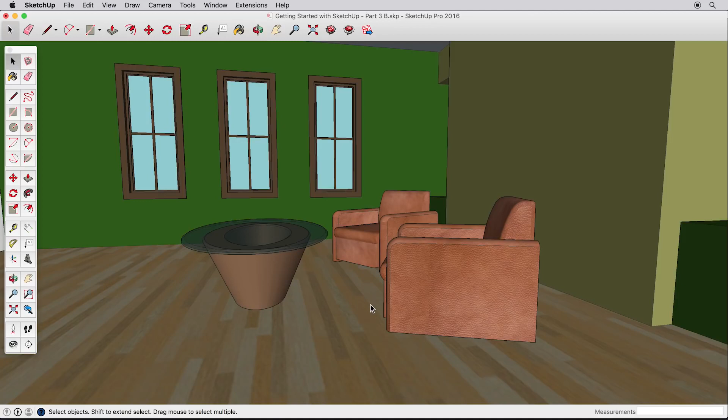If you were creating your own space, the first thing you need to do is take some basic measurements of the size of the room, and where windows or other prominent elements are to accurately recreate the space. We know how to draw accurately in SketchUp from the previous video, so for our example, let's begin by drawing a room that is 16 feet wide by 20 feet long, and push-pull it up 9 feet.

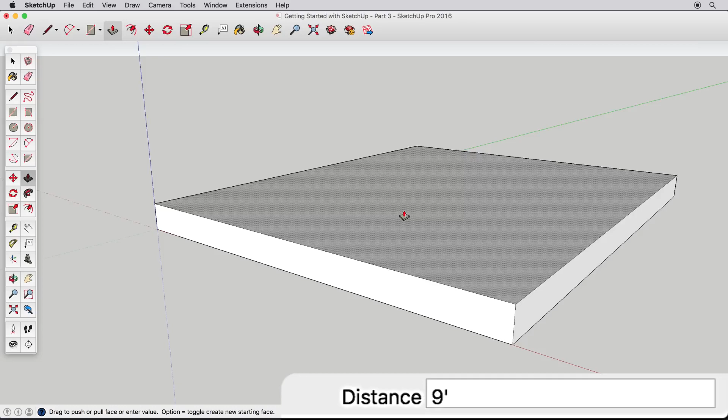When you're working only on an interior room, it's often helpful to erase some of the walls, and we can always draw them back in later. Using the eraser, erase this corner edge, which will delete 2 of the sides. You'll see the inside surfaces are a different color from the outside surfaces we've been working on, but it will have no effect on our example, and we're going to paint these surfaces anyway. Navigate to get a good view of this back surface.

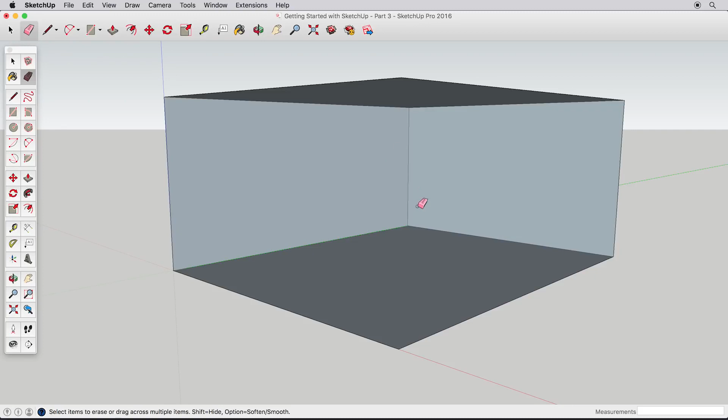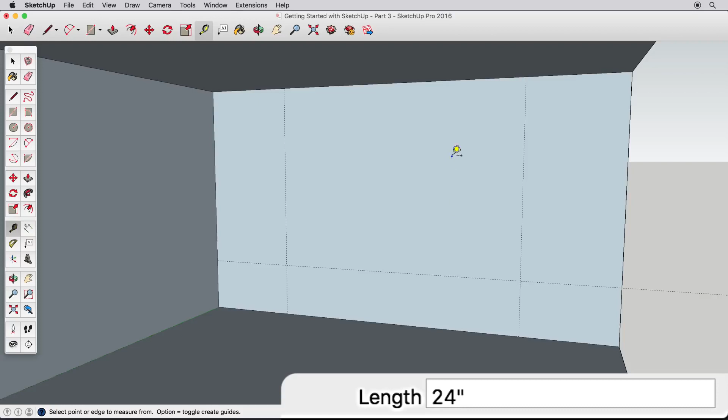Now let's use a new tool to help us lay out some guidelines. The tape measure tool can measure between points in SketchUp, but it will also create guidelines that we can reference. Click once on this corner edge and start moving your cursor this way. Type 40 inches to create a guide 40 inches from that edge. Now, repeat this process from the opposite edge. Create a guideline that is 24 inches high, and a final guide that is 18 inches down from the top edge.

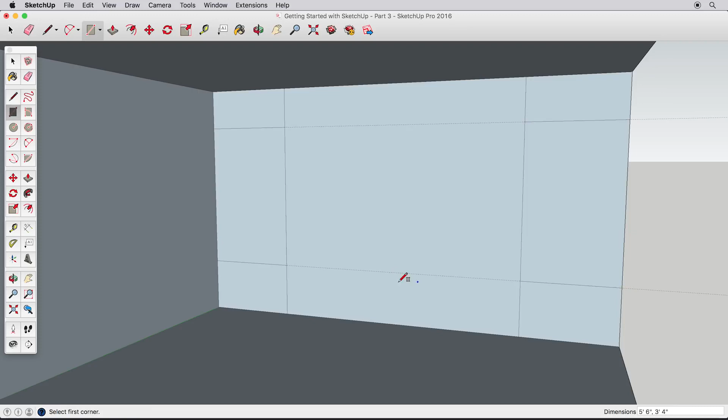With these guides in place, let's add detail to our room by creating a built-in structure. Draw 3 rectangles using the guide intersections here, here, and here. Now we can delete our guides. You can delete guides with the eraser tool, but some of our guides are now hidden behind edges. You can see this by zooming out. Zoom out far enough to see all the guides and erase them. Or you can also delete all the guides in your model by going to the Edit menu and choosing Delete Guides. Navigate back into our room.

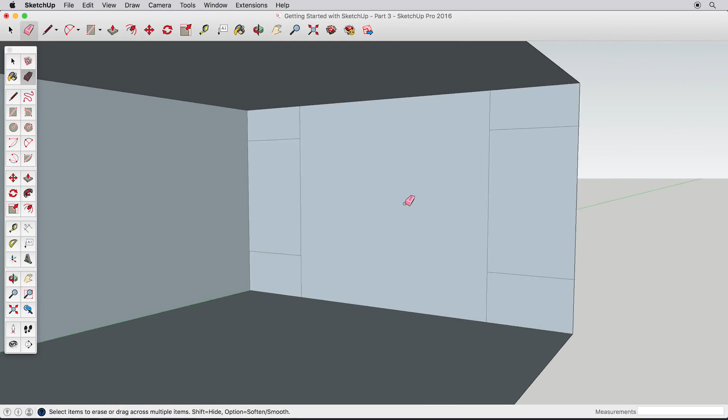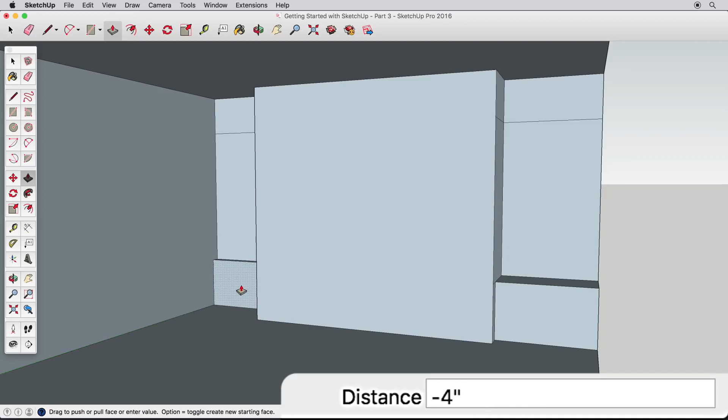Use Push-Pull to pull this middle surface out 24 inches. Now pull this lower surface out 18 inches. We need to pull the far surface out 18 inches as well, but rather than manually inputting the distance, we can use inferencing. Click once with Push-Pull on the far surface to start pulling it and leave the surface with your icon. Watch how hovering over various surfaces will pull it out to match. We can simply infer to this near surface and click on it to finish.

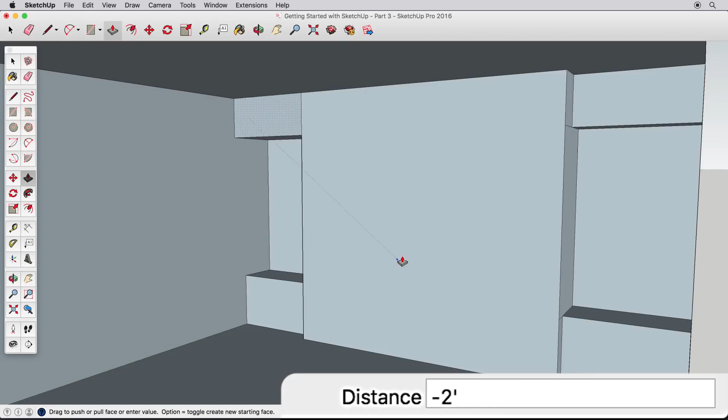Try again on these upper surfaces. Pull one out 2 feet, then pull the other surface out and watch how it will infer to the other surfaces. Remember, you'll click once on the first surface to start the push-pull, but you'll finish by clicking on the other surface. It's good modeling technique to keep your model clean. Let's erase these extra edges created from our push-pull.

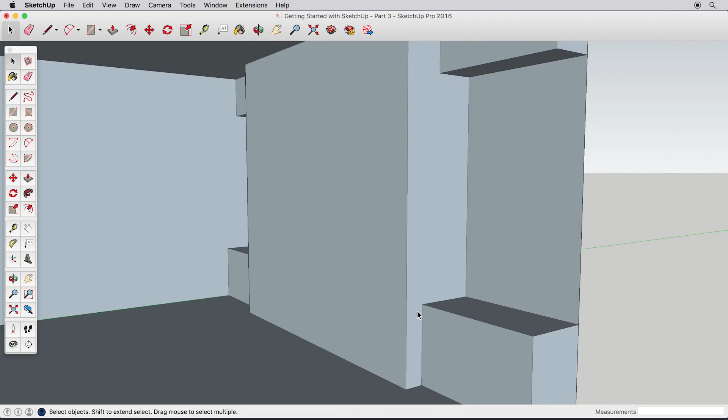Anytime you have surfaces that are coplanar, you can erase the edges separating them. This is called healing the surface. Zoom in if you need to erase the unnecessary edges. We need to navigate to the other side and erase those edges as well. When you do, it's tricky to find the ideal view, and it's easy to orbit outside of the wall surface.

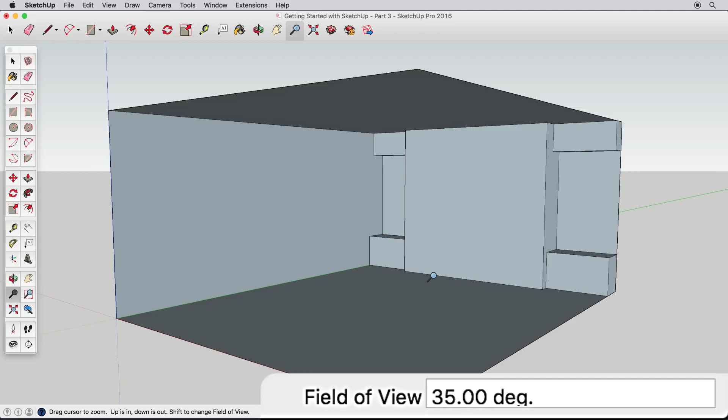Try this. Navigate back to a full room view, and then choose the Zoom tool. Look down in the measurements box. It shows your field of view is 35 degrees. You can change this just like changing the lens of a camera, allowing us to see more perspective in our view, which is particularly useful for interior scenes. Type 50 and press Enter. Now the field of view shows 50 degrees, and we have a broader view of our scene. Navigate back to the corner and find a good view to erase the extra edges.

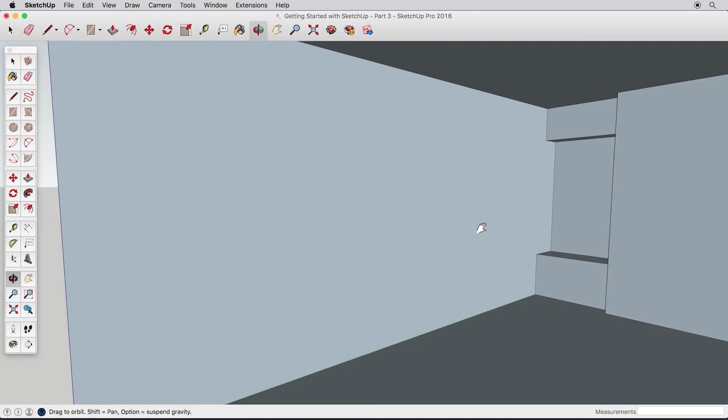With that done, let's turn our attention to creating some windows. Navigate to a good view of this wall and use the tape measure to create a guide 5 feet from the far wall. Create another guide 30 inches from the first. Now create a guide from the bottom edge and infer to our built-in structure to finish it. Do the same from the top edge so our windows will line up with the other elements in our room.

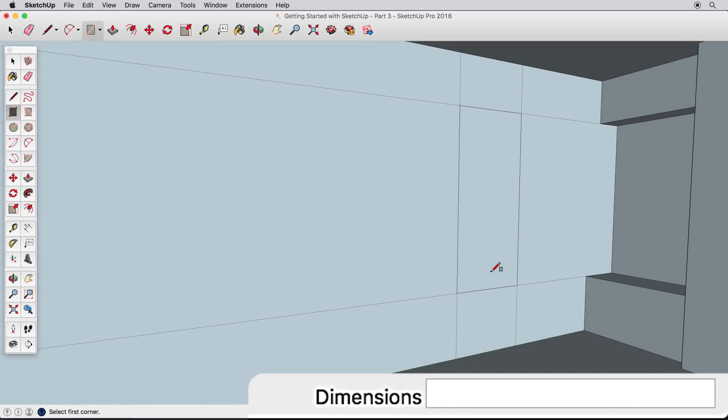Draw a rectangle using the guides for our window. Our room will have 3 windows on this wall, and they'll be 18 inches apart. Create a guide 18 inches from our new window. Now select the new rectangle, then the Move tool. Move the rectangle from this lower corner and start moving it along the wall.

While still moving the rectangle, press the Control key on a Windows machine or the Option key if you are on a Mac. This leaves the original shape and creates a copy for you to move. Use the guideline reference to place the new rectangle. Practice this again for the third window.

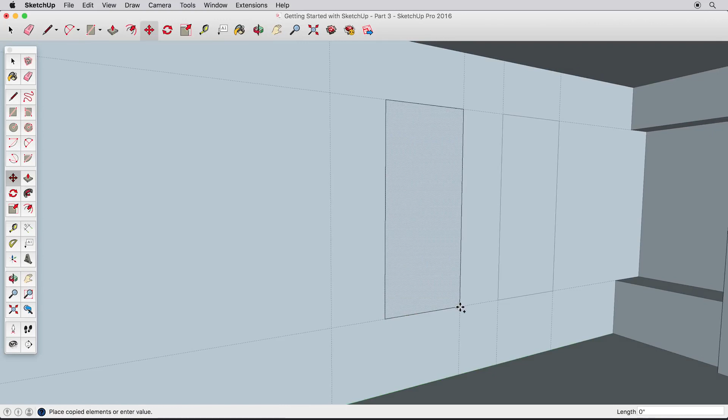Create a guideline 18 inches from the new window. Select and move a copy of the window by pressing Control or Option on a Mac. And remember to move it exactly by moving it from a corner to a corner. We are finished with the guides, so go to the Edit menu and choose Delete Guides to erase them all.

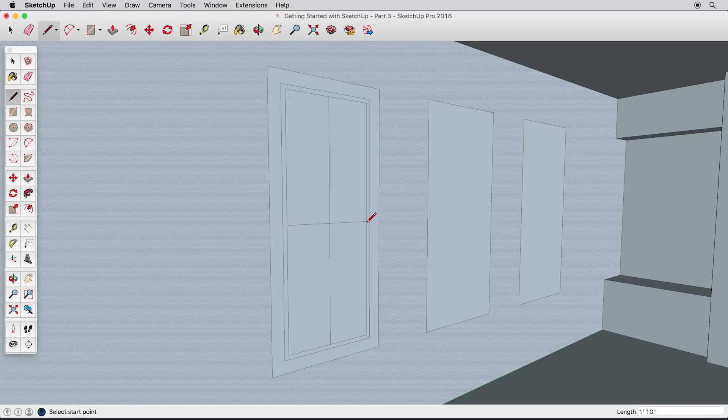To make the windows more detailed, we'll use the Offset tool and introduce some new tips to help you work quickly. Zoom into one of your windows and offset the surface inwards 3 inches. Then select the inner surface and offset it 1 more inch. Now, use the Line tool and draw 2 crossing edges from the midpoints of the inner surface. Finally, select one of the new rectangles created by the crossing edges and offset it in 1/2 inch for a window mullion.

SketchUp will remember the last distance you offset, so rather than typing in a value for the remaining window mullions, select another surface, then using the Offset tool, double-click on that surface. It will offset it the exact amount of the last offset. Try again on the 2 remaining rectangles. Select the surface, then use the Offset tool and double-click to quickly offset it by the last amount.

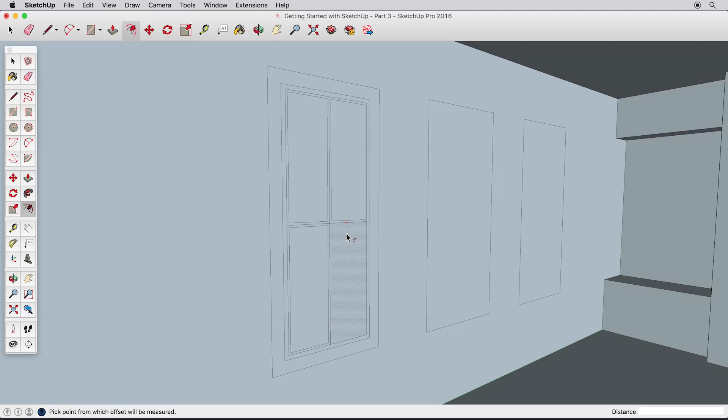Double-clicking also works with Offset. Try selecting, then offsetting one of the windows in. Then select a new window and double-click with Offset on a different window. Continue this for all windows. Select the surface, then double-click with the Push-Pull tool to push it in the same distance.

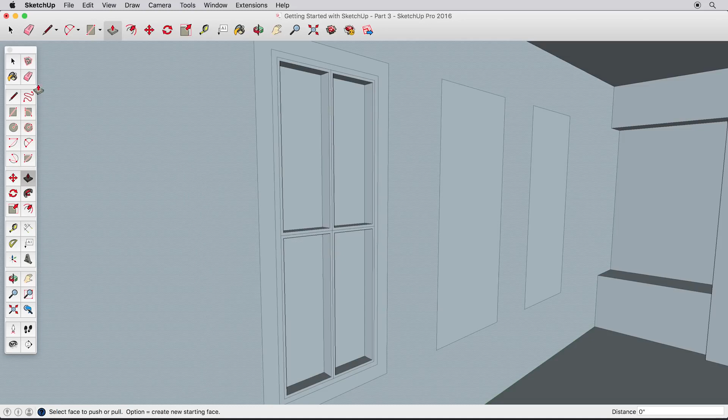To push the window mullion back, let's first zoom in and erase the crossing edges to heal this into one surface. Then push it back, and also pull the other surfaces in or out to create an interesting window and frame.

Now we need to repeat this process for our remaining windows. And because we've built one, we can use inferencing to quickly repeat the process. For example, I can offset this surface from this lower edge and infer to our completed window for the correct distance.

Although we are offsetting the whole surface, choosing the right edge to start the offset will determine which inferences are available to you. So in our example, we want to offset from horizontal edges to infer to parallel edges. Offset the frame, inferring back to the complete window. Divide the windows with 2 edges drawn from the midpoints.

Then offset one surface using this inference, and the remaining window surfaces by double-clicking as before. Use push-pull and inferences to complete this window so it's an exact replica of the first window. This third window is available for you to continue practicing on. Repeat the steps we've taken to replicate another window.

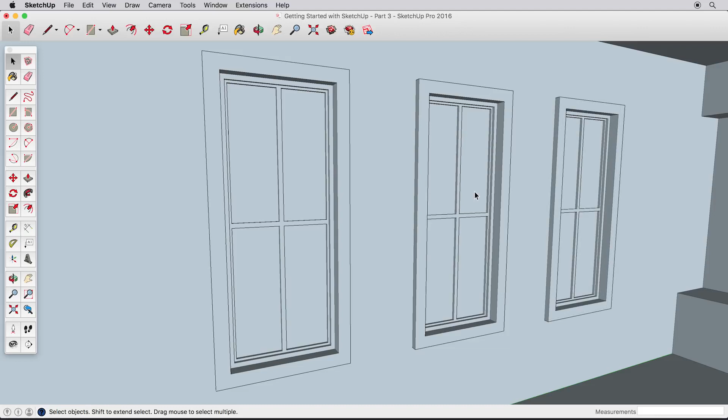Of note, we are drawing these windows manually to practice these drawing techniques. But in our next video and other videos, you'll learn about better techniques for creating copies and repeated elements. But that is beyond the scope of this video. At this point, our example has some interesting details, but color would help a lot. Let's apply some paint and materials.

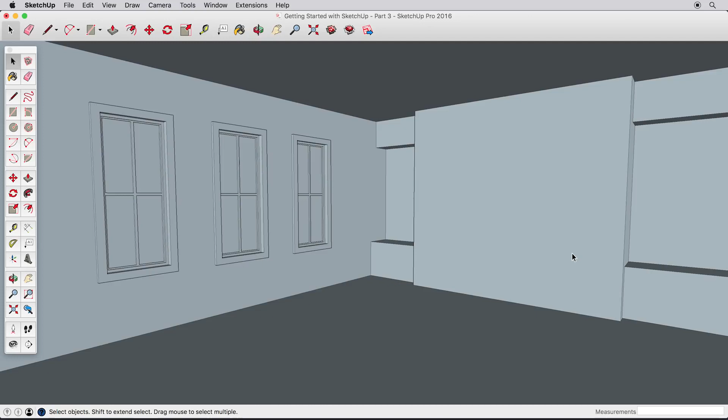Applying color is one of the few tasks that is slightly different on a Mac versus a Windows machine, so we'll cover both. The basics are the same though. Pick a material and paint it onto surfaces in your scene. Select the Paint Bucket tool to bring up the Color or Materials browser. On a PC, you're shown a default palette of colors to pick from, and on a Mac, you're given a color wheel to pick colors from.

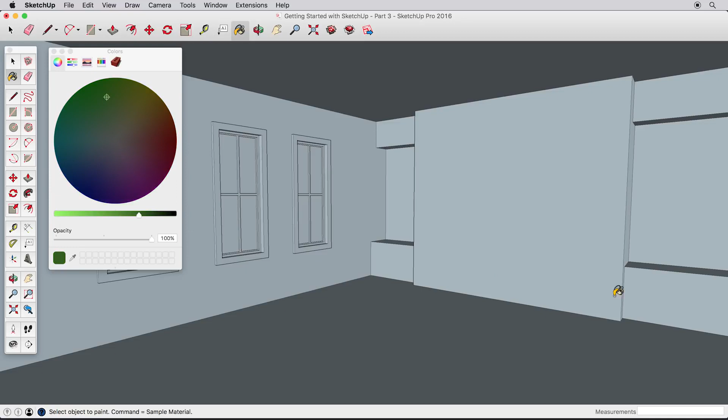Choose a color, then click on a surface to paint that color. Continue painting surfaces in your model. Pick different colors and try some various color schemes in your model. Navigate around as needed to get different sides for your walls, but don't paint the windows yet.

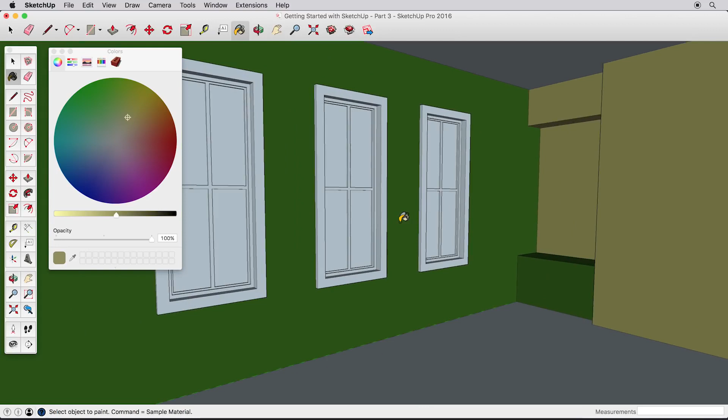For the windows, we'll introduce a tip to make the process easier. To start, let's pick a pale bluish color to represent the glass in the windows. The trim, however, has lots of little surfaces to work around and paint. Try this. Since our window trim is all still the default blue color, we can paint it all at once by holding the Control key on a PC or the Option key on a Mac.

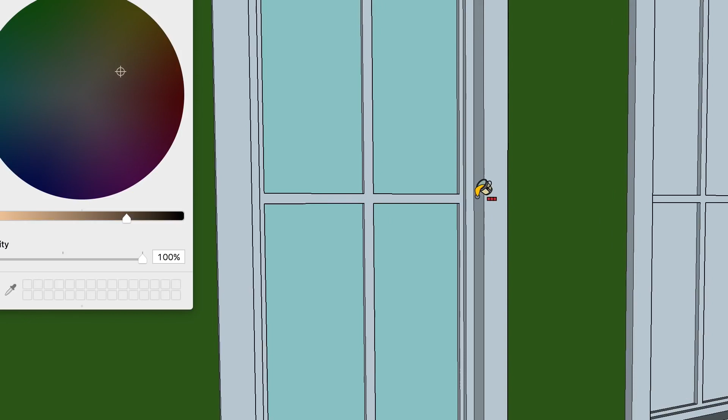Choose the trim color, hold down the Control or Option key, and click on one window trim surface to paint all the connected surfaces of the same color. With one window done, we can quickly complete the other two. However, we need the bluish window color again.

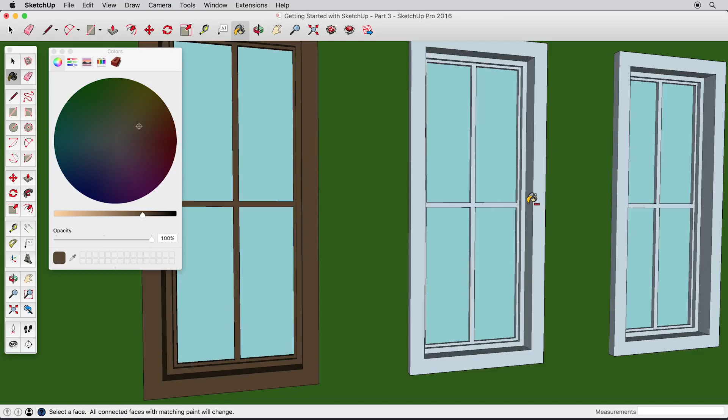With the paint bucket active, hold the Alt key on a PC or Command key on a Mac to turn the paint tool into a sampling tool. Then click on one of the painted windows to sample and pick that color for use. Now paint the remaining windows. Then hold Alt or Command again to sample the trim color. Then paint the remaining trim as before by holding the Control or Option key.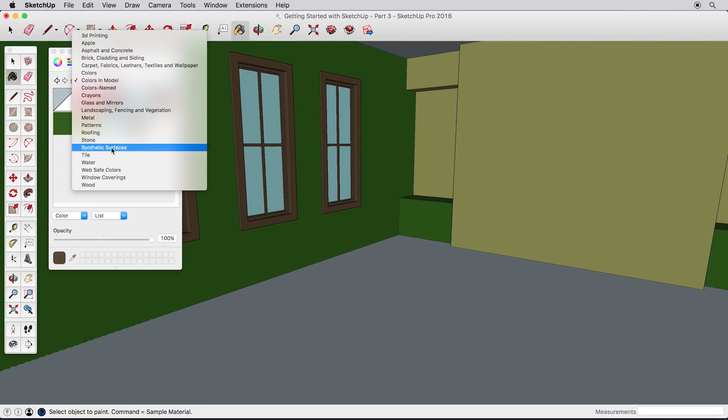In SketchUp, you can apply full textures and materials, not just colors. On a Windows machine, click the house icon to see what materials have been applied in your model, and open the fly-down menu to access textures to paint in your model. On a Mac, choose the brick icon to access additional textures. Paint some more materials into your scene as you'd like. It's also possible to create your own textures to use in SketchUp. See our documentation for more information.

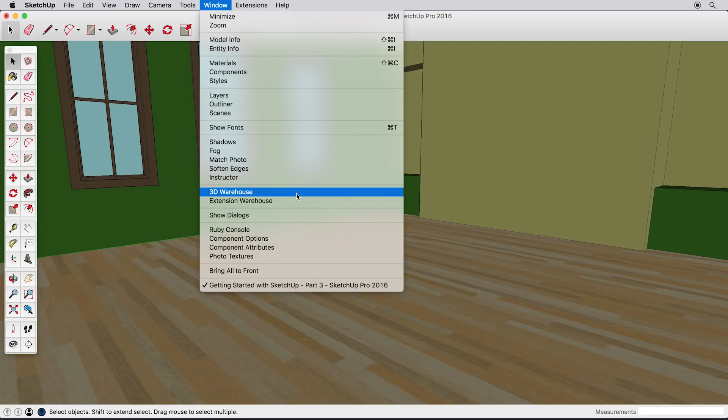To complete this example, let's add some furniture from the 3D Warehouse, which is an online repository of millions of models where anyone can upload and share SketchUp models. As long as you're connected to the internet, you can search the 3D Warehouse directly from SketchUp. Go to the Window menu and choose 3D Warehouse.

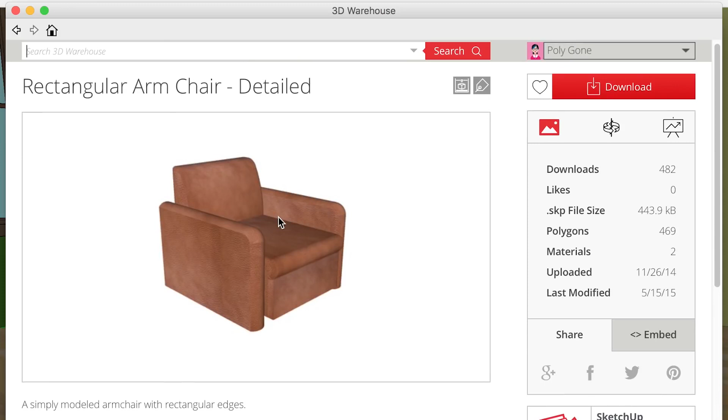From here, you can browse or search for any models you'd like. Searching for chair will return thousands of results, so be more specific to refine your results. Simply click on one of the results, then click Download to place it in your model.

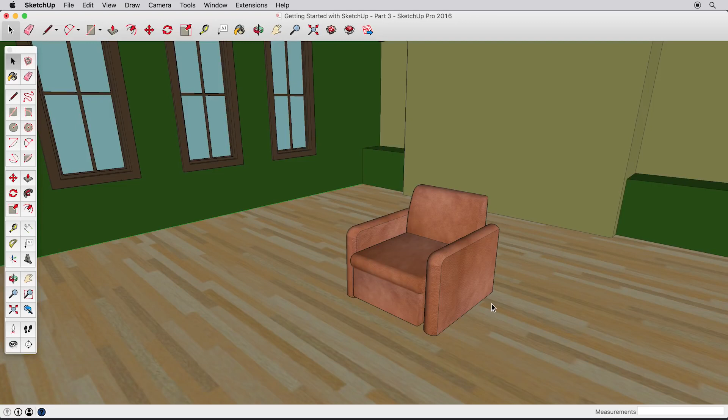With the new model in your scene, let's look at how to properly move it around the room. The chair is grouped together, and we will learn more about groups in the next video, but objects that are grouped can be moved and rotated like a single object with the Move tool. Select the chair, then pick the Move tool and hover the cursor around the chair. There is a bounding box indicating the group, and small red points show up on the different sides.

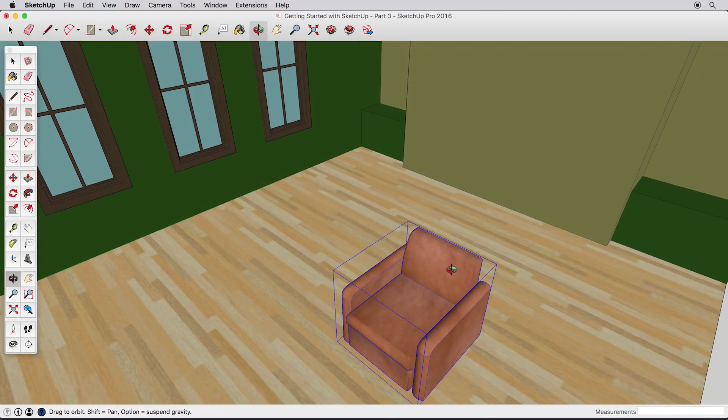Hover over one of the red dots, and a rotation gizmo appears. Click on the red dot to rotate the chair in that axis, and click again to finish. You can rotate freely or in 15-degree increments by hovering the cursor close to the rotation gizmo. Orient the chair as you'd like, and let's talk about moving it in your scene. You may want to move the chair over here, and suddenly it's buried in the floor. Probably not what you expected.

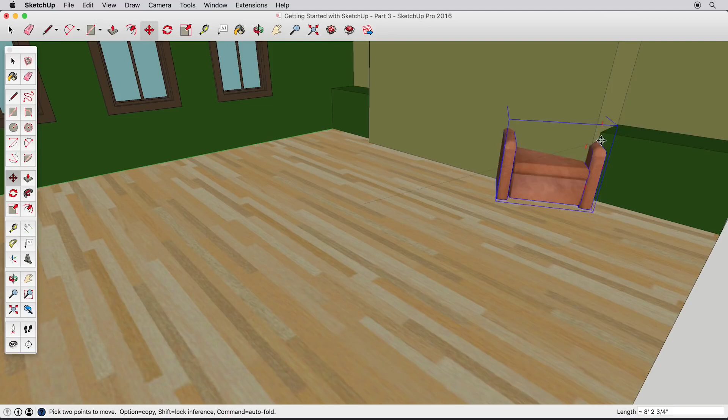Let's undo that. When you move objects in SketchUp, you always need to be aware of where you're starting and finishing the move. For example, if I click on the armrest to start moving the chair, it will move that point to other elements in the scene that I hover over. To be sure the chair stays on the floor as I move it around, I'll move it from a point that should touch the floor. The leg corner, for example. Now I can move it easily to another point on the floor.

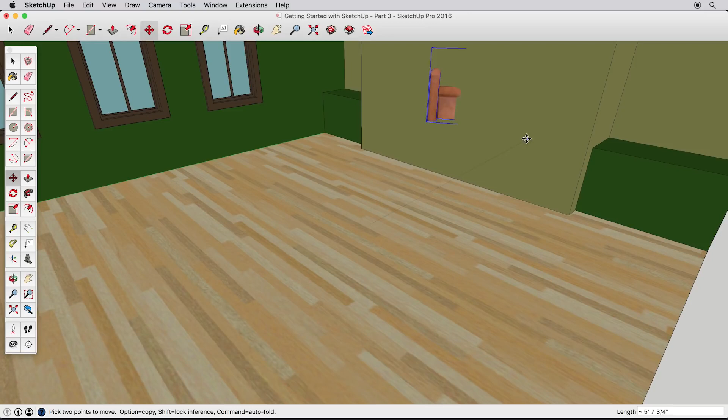Another way to quickly move it is by pre-selecting the chair. Then, using the Move tool, I can click on some point on the floor and move it to another point on the floor. Remember, though, that you started moving from this point on the floor, so you must move to another point on the floor. You could still move the chair up by moving it to some point on the wall. Always be aware of the red, green, and blue directions as well, so you don't accidentally move the chair straight up.

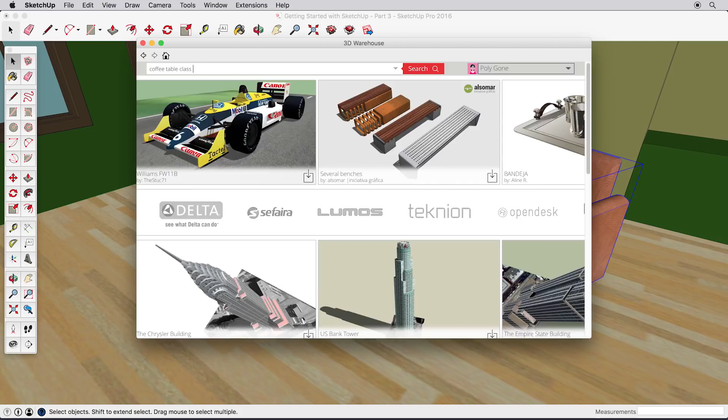Remember as well that you can press the Control key on a PC or the Option key on a Mac to create a copy while moving the object. Now practice by finding more items from the 3D Warehouse to add to your scene and placing them around the room. In the next video, we'll learn more about creating groups and copying objects by creating a small table.